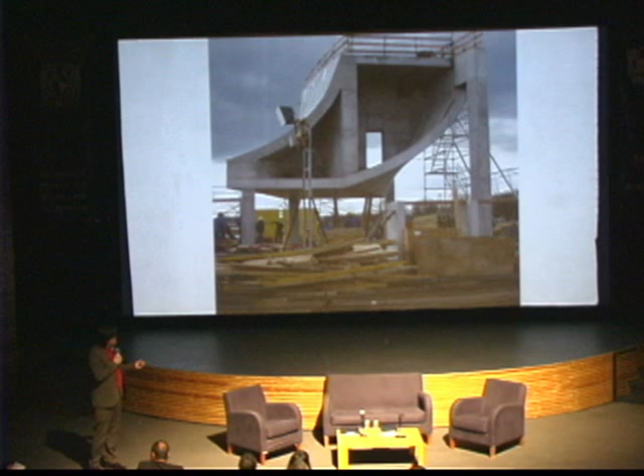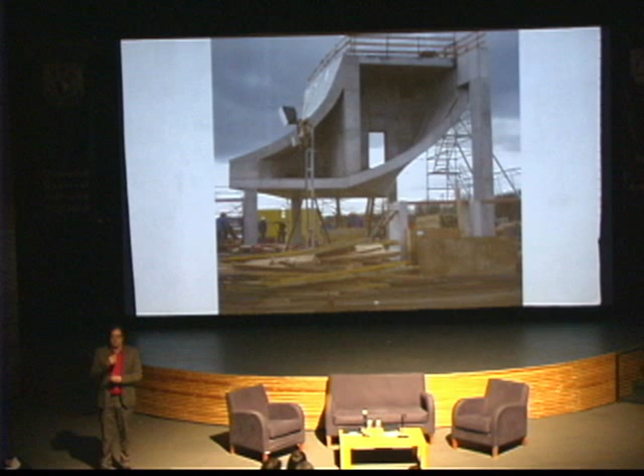On site, we work with large mock-ups. It's the same as a model, but then in one-to-one scale. The reason why we do that is because we can then test if the contractor understands what we mean with a nice and flat surface. And if we can approve that by signing it off, during the construction period we can always refer back to our mock-ups. We do that also for the facades.

Sometimes it goes wrong, so you see a part of the team desperately thinking about how to solve it. And then we go back to our drawing boards and sketches and continue working.

Sometimes this is an engineer. The engineer does not believe our vision on structure. We, however, are very enthusiastic and motivated to explain him why we think it is possible.

And I think when I go through the projects, you understand why we have to be super positive. So I think one of the challenges is, as an architect, to never get depressed and to always be super positive. That's really an advice I would like to give you. Because in the end, everybody you will meet who's working on your project, trying to build it, will tell you that it's not possible, or that it's too expensive, that it's not within the planning budget, and everything else they can mention, because these are different values, different parameters.

For us as architects, we value money different than quality. And quality has a different value, and I think it's a language that we know, and that we always have to explain to clients and other advisors. So we are traveling a lot, and we want to organize knowledge. I think knowledge is something that can really help us convince clients to believe in what we are doing.

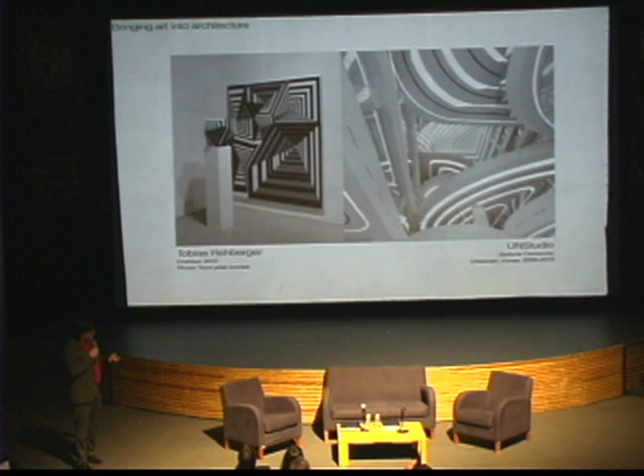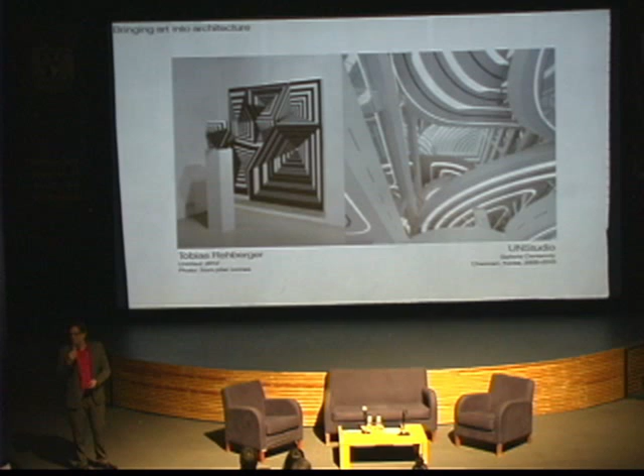If you want to have people moving up in a retail building, because square meter prices are more expensive on the ground floor than one level higher - the higher you get into the building, the lower the square meter price is. But as an architect, if you can bring people higher into the building, the value of the building increases. Every developer likes that, but look at this - this isn't a great image to present something like that. Without a story about economics, no developer would step into it.

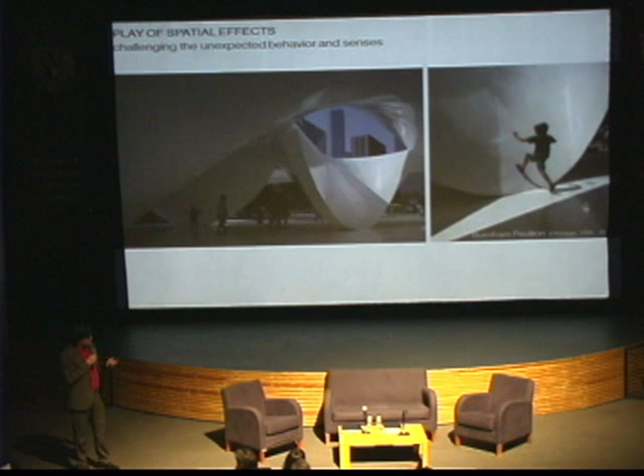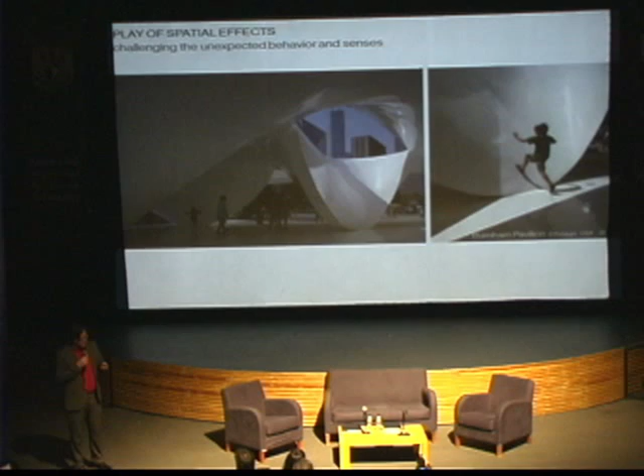The same with pavilions, playing fields. Not only the pavilions themselves, but also the way you could test and experiment with pavilions is great. You could really look at seamless materials, look at how it could become a playing scape, but also how you could frame pieces of a city.

I think there's a lot happening at the moment in computer developments, software developments. One of the things we think is fantastic is that you can have new CFD analysis for calculating wind patterns. For this project, we said we are calculating with CFD analysis if you can get the wind to 20 meters height.

You have to imagine the project is close to Shanghai. Shanghai is super polluted - this is Hangzhou, where people from Shanghai normally have their holiday home. In this area, if we can get the wind to 20 meters, we can get a small draft, and because of the draft, we can cool down the lower level, the first 1.5 to 2 meters. We calculated with engineers that it would cool down around 8 to 10 degrees, just from the wind you already have.

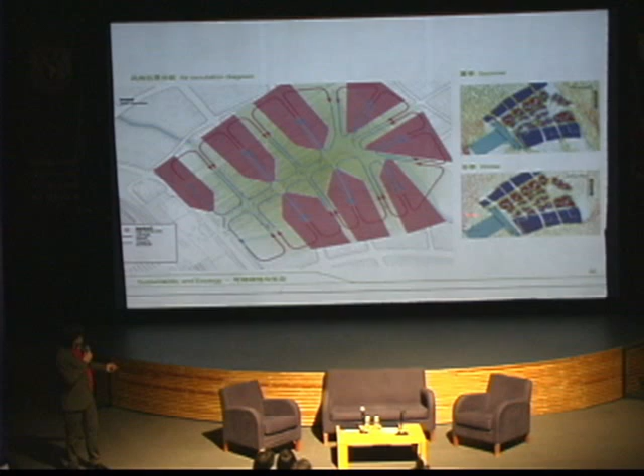The only thing you have to do is make a canyon of 1.5 kilometers and around 400 meters wide. But to do that, you need to densify the program on the sites. So as a master plan and project, we think it's crucial - if you want to make cities healthier and lively, you have to look at these kinds of solutions, different from the standard urban grids. Using the wind, you can do this in a lot of ways.

I think these are ways of designing sustainably, but in an innovative way, and we think there's a lot of potential. The last few days I was here in Mexico, I'd say we have quite some wind, so it would be good to use that in projects. It would be nice to see how to cool down a city - the advantage of Mexico is that the city is very big and doesn't have a lot of super high rises, which means you could actually use that.

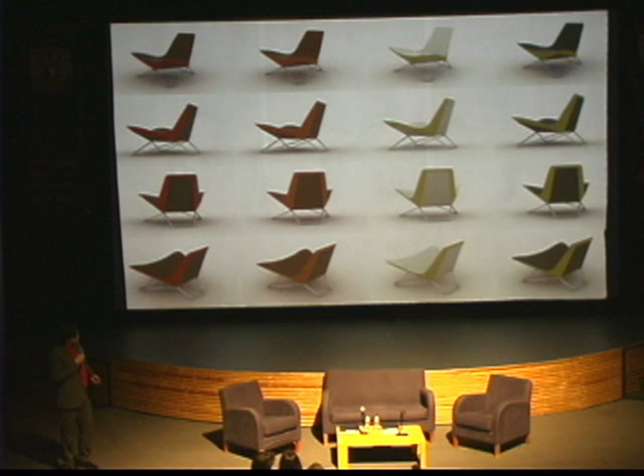Start on a small scale, furniture. I think in furniture it's much easier to use color. So if we design furniture, this was presented last year in Milan and this year too, we can easily use color—nobody actually challenges it.

If we use it in a building, it's immediately a problem. We talked for a year with the urban planners about the outside facade. We could not use color there.

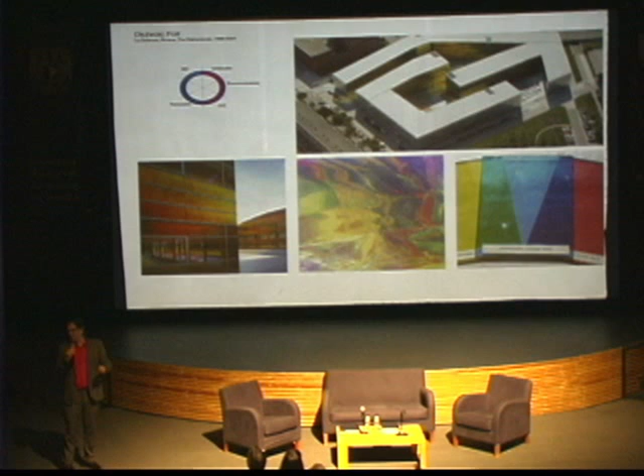But imagine on the inside we use a color that actually changes when the sun changes its direction. So when it's blue, for instance, you know it's lunchtime. When it's red, you know you can go home.

And the same as with artists—there are a lot of artists who work similarly to the way we are looking at our work.

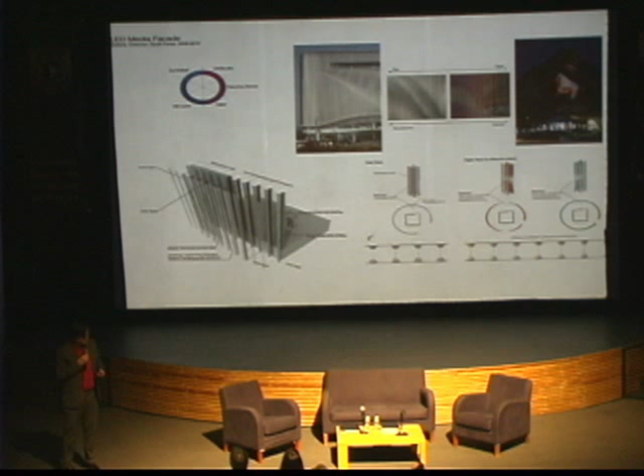Technically, the LED was not invented only to produce light, it's also meant to communicate, is our belief. So designing facades where LED lights can play a role without becoming too commercial is quite nice.

So this is the largest LED facade in the world at the moment, in Korea. You literally can project images on the facade. We made high resolution in one corner and then it slows down to low resolution.

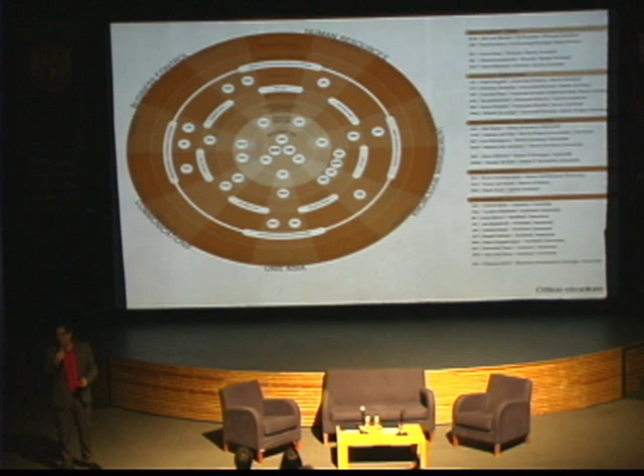Office organization, we have to organize an office always hierarchically, but we also know the importance of the staff itself, the founders of the office. It's great actually to work with Ben, because he really is motivating everybody to get out of yourself what you can get out of yourself, but also from the clients and the other people in the network. We have a team of directors and partners, and we want to be close to clients.

That's why on our business cards we keep on mentioning that we are architects, because I think that's the key thing why we were studying architecture, not to become a partner or a manager or a director, but to become an architect. That also counts for our associate team. With this team, we are actually traveling the world to meet our clients and make sure that we can deliver the products that we would like to deliver. We have our social events, because I think a good office should also organize good parties.

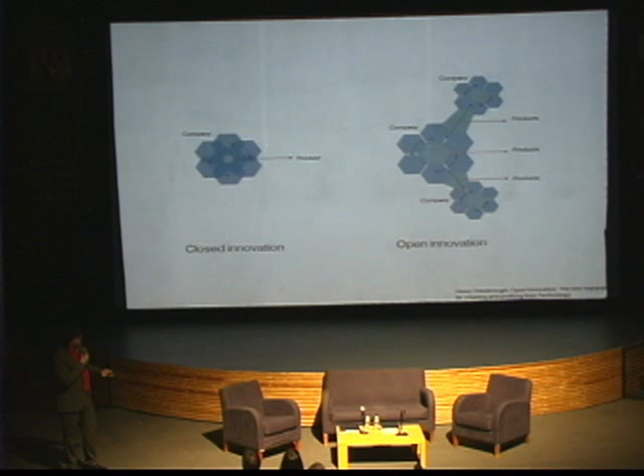What is most important is we should not keep all the information within our office, but we should really communicate, work together, and spread the knowledge that we have, because you immediately can see that there's enormous potential in sharing knowledge and asking for help or asking questions. If you don't do that, you for sure know that you won't get the answer. A lot of advisors are very open to share knowledge and to work with knowledge. At the moment, with all the information that's on the internet, it's easy to let other people and other architects or friends help out if you are dealing with a problem. Even if a client keeps on telling you, well, it's confidential, you should not talk to somebody else about it because you are exclusively working for me, actually, that's bullshit.

So, going back to Le Corbusier, I think Le Corbusier is great and fantastic, and he really changed time. But I think there's one thing, a most important discussion within the modernistic world, and that is about color. What he literally says is, take out everything. The discussion is about what is more important, color or a line. He says the line is more important than the color, because the color distracts from the line.

If you take that literally all the time, you would actually get quite a boring world, we would argue. So it's okay to do it now and then and to really make brilliant pieces of architecture, but not every building that's built is a brilliant piece of architecture.

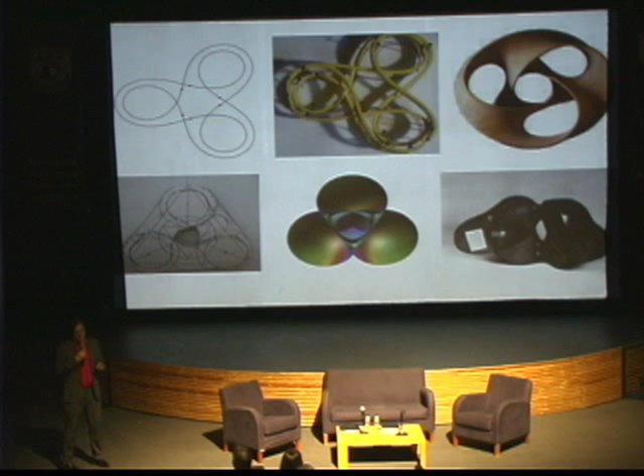Why the line is continuous is because the racing tracks of Mercedes are continuous. They put a car on the track and they have to drive 1 million kilometers in a certain amount of time to test the engines. So that concept is quite interesting. They use the Nürburgring for that. But inside a building, for cars, it's also nice if you would move around like a car, that you would feel that you are the car almost.

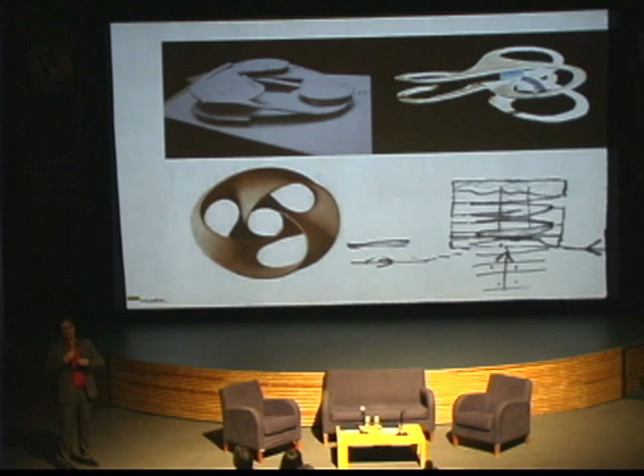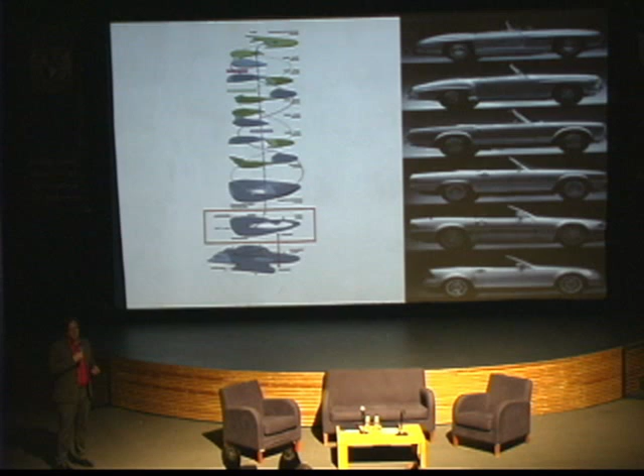Next to that, logistically, it's important to understand that most of the people that go to a museum only go there for an hour or two hours. Only when you are going there with your family and you make a day trip out of it, do you stay there all day. So what we said is you have one route which is actually the existing collection, and then another route which is just the temporary exhibitions, with shortcuts between the different exhibition floors.

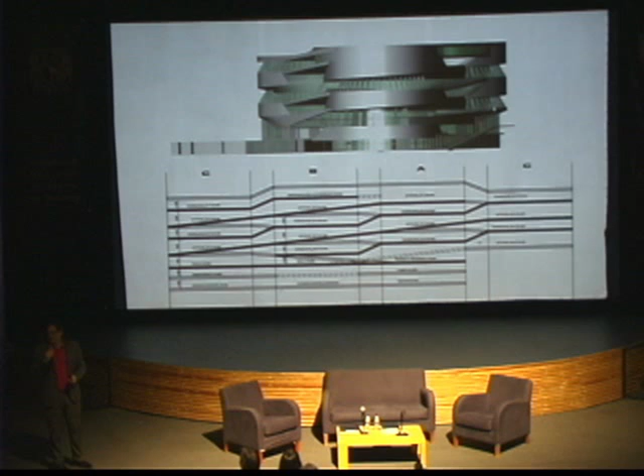We use the principle of MoMA and Centre Pompidou to create our logistics system, which is actually, if you would make a section, looks like this. And I think you immediately would agree with me that if you have to make sections of a building, and they would look like this, it's very difficult to explain to a contractor, which is also a problem, and that's why we started to build up our models geometrically, just to make sure that we could explain to the contractors in 3D how our buildings are working.

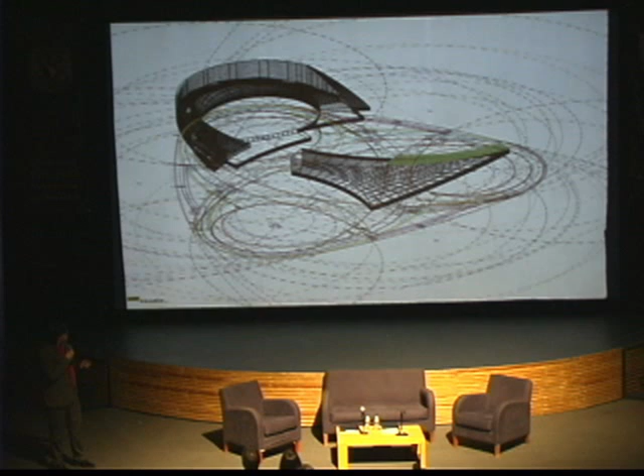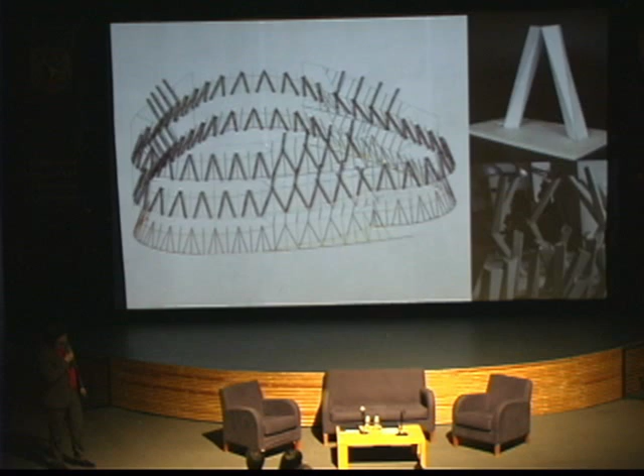However, not every contractor understands this language, so I think there's still a large development that needs to take place to be able to work three-dimensionally, because the design tools are there, we can design with it, but the construction sites are not ready for it yet. So you still build large models, which is fine because they're great to work with. This model is scale 1:43, the same scale as the small Mercedes cars you've seen earlier, so you can literally put the small cars in the model and see how it works and how they drive.

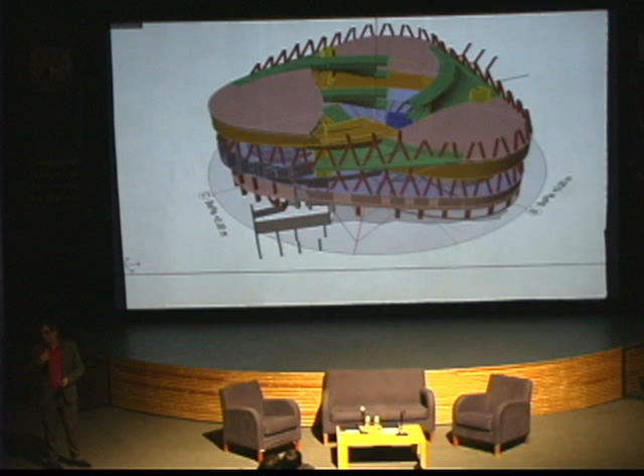Of course, 3D modeling and BIM modeling is key to communicate, but we constantly had 2 people working on the construction site and on communication to make sure mistakes could be corrected. Yes, we had to make technical drawings, but we also know that if we went 1 meter lower, the drawing would already be different.

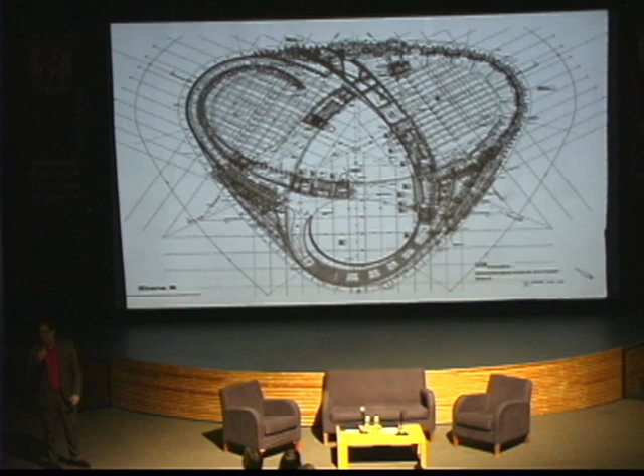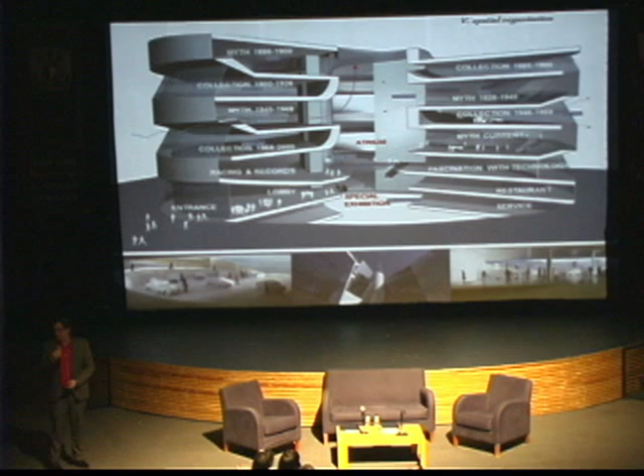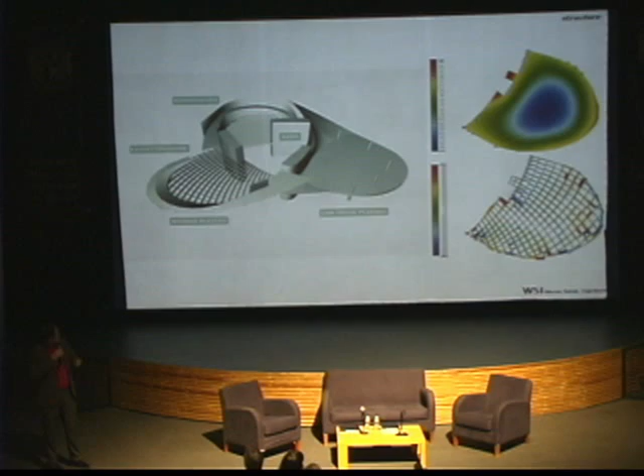That's also related to our structural system, which more or less runs like this. But we wanted free span, no columns, to give the cars the space they need. With the engineers, we looked at the structural systems and how that could actually work. I think for a building like this, the software you have at engineering offices is great for generating these types of buildings. We constantly kept adjusting the building with new information, which generated quite some speed.

Construction site, 24 hours a day, full-time people in shifts, 8 hours on, 8 hours off. That was necessary to meet the deadlines. So you can imagine that's quite an interesting pressure to work with. I think there too, communication is key, because everybody who wakes up in the morning and wants to go to work would like to do so with a smile. If you're frustrated for 2 years, it doesn't work. So you have to find a way to make it fun to run a construction yard like this. That's what we tried, and of course also cherish the moments when a piece comes out right, when you're actually happy with the result.

Facades. Here you see the large atrium where you enter, and the elevators that bring you up to the higher levels. We were able to design the elevators ourselves. When you entered, this was the space you were entering, and there's just one horse standing there, which represents this 1 PK.

And then you go down, and this is the point where this tornado came out of, where a jet engine was literally put in. And you walk down through the building.

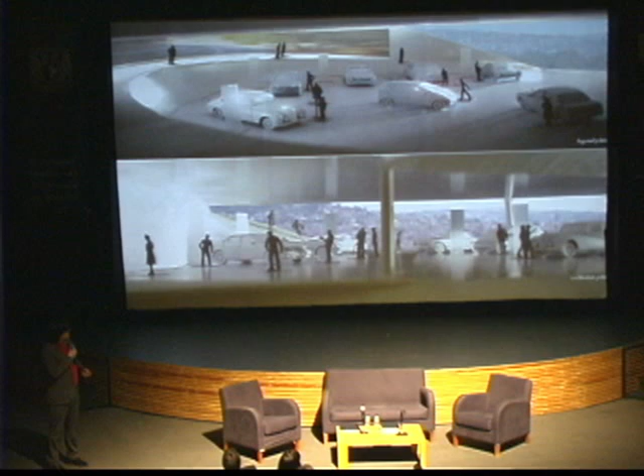So designing the interior, like the exterior, they literally were able to put the cars on the wall. It's great to see a row of cars, and they made sound next to it so that when a car was in the spotlight, you'd actually hear its sound too, because every engine had its own sound. You know it when you're listening to Formula One.

So for us, designing is a kind of process we go through, the same as with traveling. You all know that if you go to an airport, it looks like this. So the question is, what's the best way to organize an airport? This is actually what we would like, if you're flying, just a bit more comfort.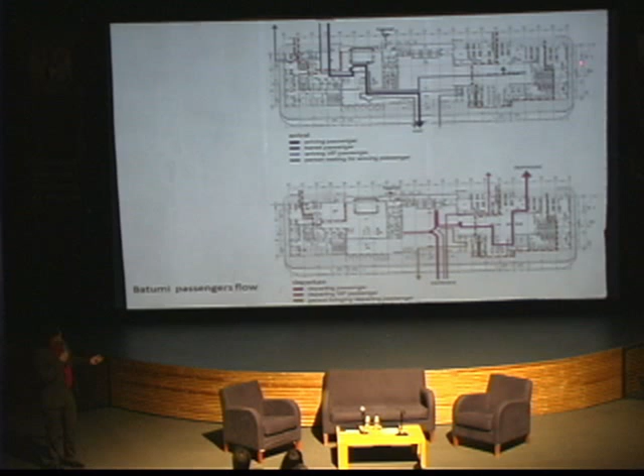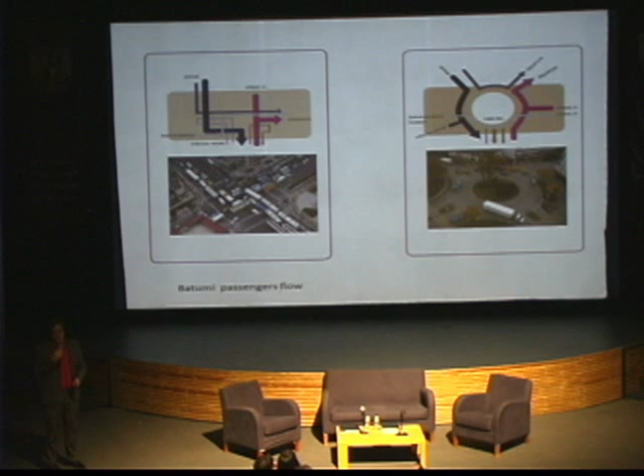This is how a plan of an airport looks like if you analyze the logistic flows, and this is what you get, because the luggage and security is more important than the people. So we proposed an airport like this, where people would actually have a much easier flow through the airport. We had quite some discussions with security and luggage handling people, because they needed an extra scanner, but in the end we convinced them this would really be the right solution, that if you're standing in front of the building you can literally see the planes. It's a small airport, so why make it too complicated?

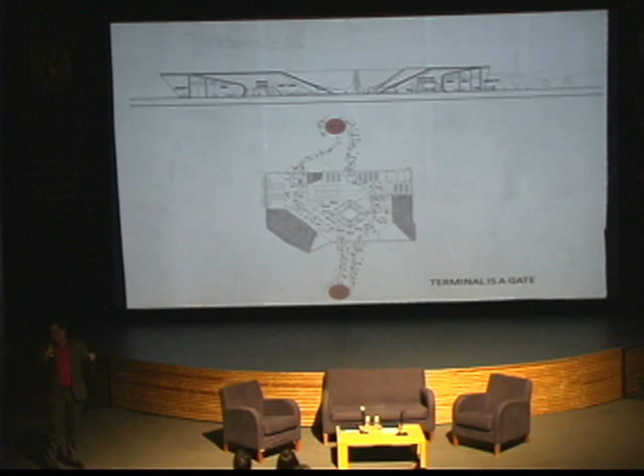And we could design the air traffic control tower, which is also quite a nice tower to work on, because on one hand it's super complicated, and on the other hand, it's the place where safety is being organized on a very high level.

Pavilions. But imagine what happens at night with a pavilion if you start to use light. People were married here. People made appointments there with Facebook, social media. It became a destination. Even if it's very small, it still became a destination.

Or this, one of my favorites. It's built before the Second World War in the Netherlands to protect the Netherlands from attacks. I mean, you have to understand, we as the Netherlands have been conquered by the Spanish, by the French, by the Germans. So most of the time we were either at peace or we were conquered.

This is a Dutch army, so you also understand why we were conquered all the time. And what we did was we were flooding our own country. So Holland is for 1/3 under sea level. So by opening the dikes, you were flooding your country again. The only thing we did not—

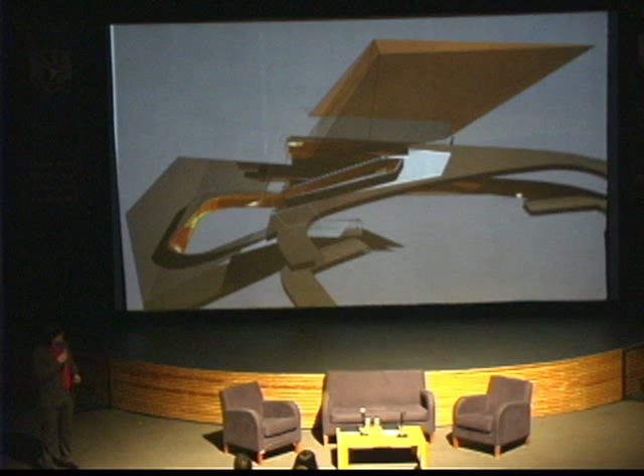So this theater has a huge skylight, and the way the staircases go down is actually followed by color. You can program it in the computer and then look at how it works in reality. The interesting thing is the color changes again—it goes from pink to purple to almost orange.

So the way it's used is also sometimes theatrical. So why not make a foyer where the foyer is also the meeting point, like the theater itself? In most of the smaller cities, this theater has a public function—people from the neighborhood go to the theater also to see the play, but also to be seen. So it's also a way of connecting communities.

But you have to look at the sizes. I think this is a village of about 60,000 people. So with 60,000 people, you can have one or two theaters.

New computer technology to develop sound, to design with sound, literally by changing the facets and fractions of this auditorium. And if I'm on the stage of this theater, I can talk without a microphone, and every seat can understand me. That's what we could do with the acoustics in this room.

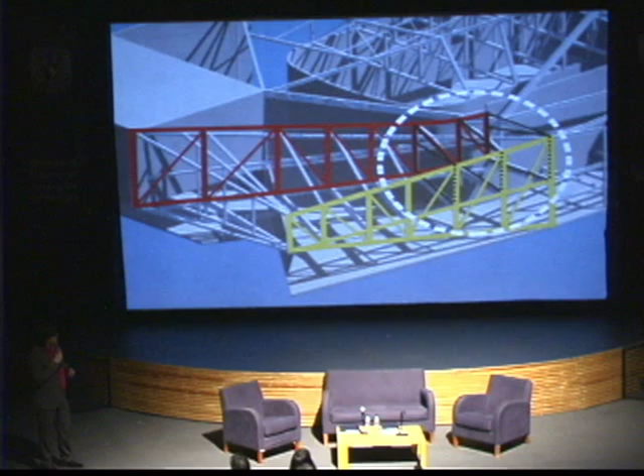And that's 750 chairs, engineered with important vibrations in mind. These pieces of rubber are between every piece of steel, and this is for the main auditorium. What you normally have with a car—we had to put these elements underneath it so that we could reduce vibration. It's also something you know from earthquake areas.

So we made it orange to make it also a bit lively in the city. Together with the urban planner and the mayor, they were all really pushing us to make something with a bit of color, because the city was very colorless—gray, brown.

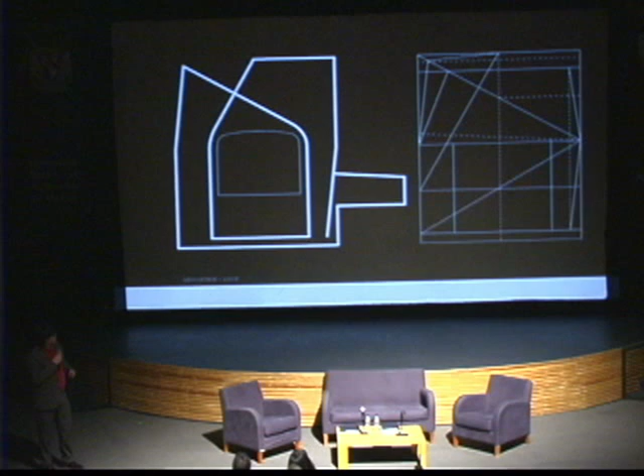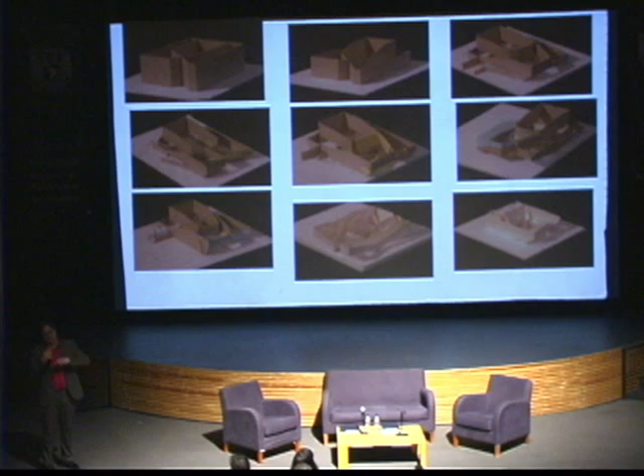To design these kinds of details, we put everything also in 3D to make sure we could organize it. So organizing the theater as an architect is also about looking at geometries and how structure works. These are just structural models to see how we could design different beams. We were just sitting for a few afternoons with the design team, from trainee to director, making these kinds of models to figure out how it worked.

All the measurements need to be repeated—details, 3D details. So we use Rhino for this. It's a very cheap software package that can also be downloaded for free, and I think Rhino is a package that every student of architecture should use.

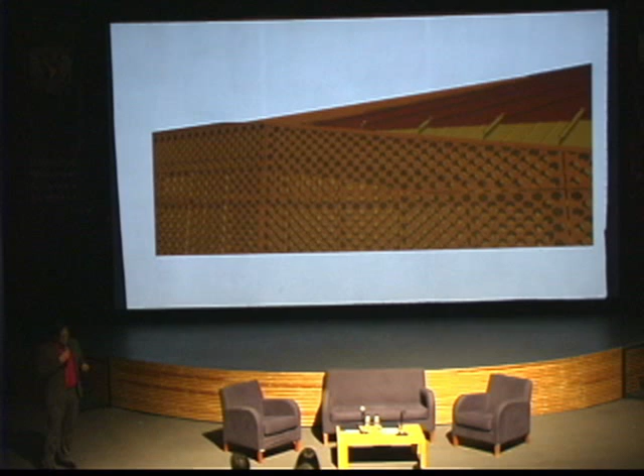It's like playing a game. If you know how Rhino works, you go to the next level. And if you know how the next level works, you go to the advanced level.

All the smoke exhausts are behind the screens of the facade of the theater.

In Holland we love skies. We have groups of painters that use light because of the sky, like Rembrandt and Van Gogh. We have painters that are only designing skies, what we call the School of The Hague, a very famous school only collecting and painting clouds because of the light. And that's because we are in the Rhine Delta, very low. The clouds are also very low, so the light reflects into the clouds and into the sea and back, so you get a very interesting contrast to work with.

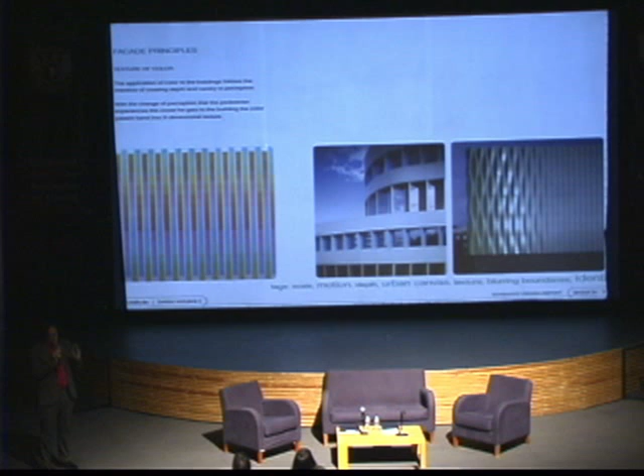Using the clouds as a concept, or using light as a concept, or even makeup, or Japanese mangas as color concepts, is something we are looking at in our office to see how we could actually plan and design with color, or Riley, an artist. This is a building in Stuttgart, where we use this color also to play with how the buildings works, or a laboratory building, just opening up in key corners.

Inside, bright orange, it's great to be there. And there are only 8 to 10 students and scientists working on one floor in these laboratories. This is the Stuttgart Virtual Engineering Center, and especially the way how the color changes through the day is fantastic to see.

And inside we played a bit more subtle with the colors in the staircases. So you see the yellow here, the orange there. But I think we would like to use it a bit more, but our German client was also afraid of that. They were afraid that it would distract too much.

But also highways, you know, why not use sound screens on highways and give it a nice color? Or small tunnels, or all these things you have next to highways. By giving it a color, this is flyovers, you could actually make it more lively. And it's also recognized because this highway, everybody who lives in the area of that small city, they know about it, but they also know that if they're driving there, that they are almost at home and so they don't miss their exit. Because in the car when you're driving, a lot goes automatically, so you're not always paying attention because you're still thinking about your work, about what you have to do.

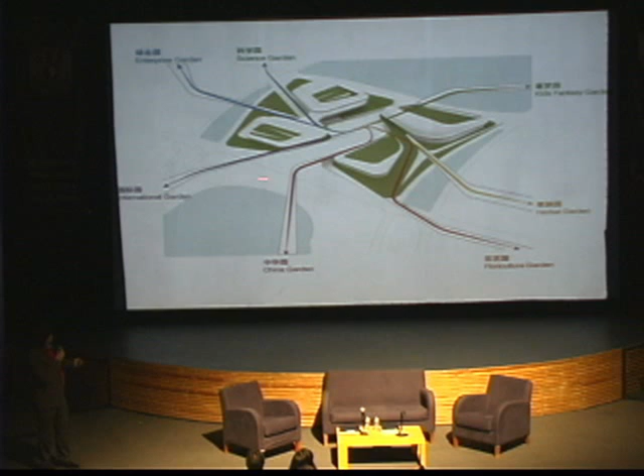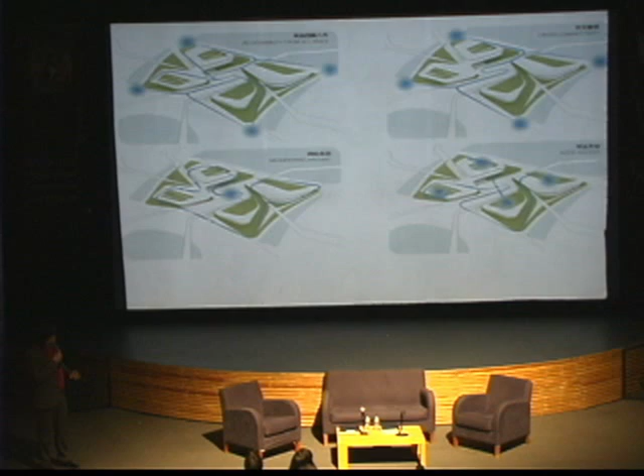And it goes into different ribbons, and all the ribbons have a color and go to different gardens. Our concept is a bit based on how we would like to walk around the building, and that is also the shape of the Chinese rose. You can go in different ways, and we used also the different colors for the ribbons in the facade.

And I think that if you see this, knowing that it needs to be finished the 25th of April, get a bit worried.

But what about cities in Asia? Large cities like this, a lot of concrete, they all look the same. So how can you identify something? And you also know it from Hong Kong and other cities. So we think that there's quite some opportunity still to test and experiment on an urban level, also with color.

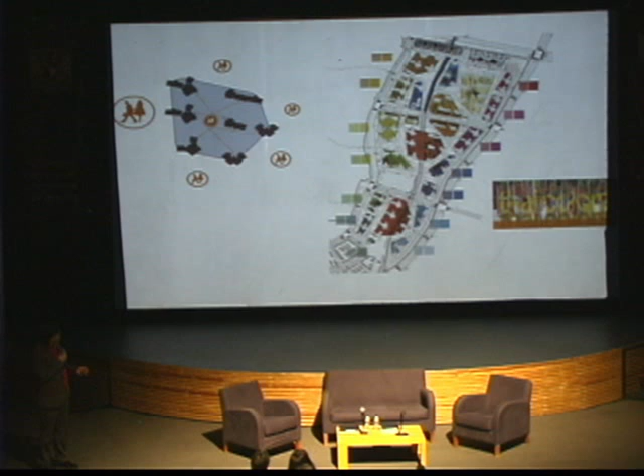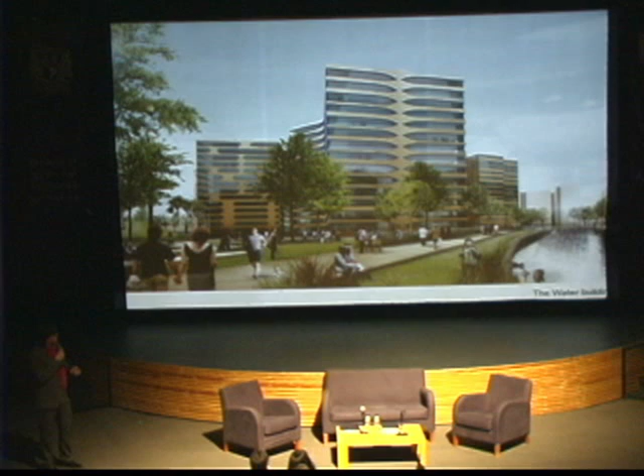So we try to work with clients also on these color concepts now to see how we could bring in more color to use it as destinations or places to come to, so that you can find your way actually back. It doesn't work actually always, and most of the colors the clients think are too bright, they don't want to use it, while it's not really bright, but still they are afraid of using the colors, which is, I think, a pity.

So the next project, also in Korea, we are working on is also trying to convince the client to use more color. And this is in the city of Daegu, and the advantage of Daegu is that it's a city where fashion is key, so it's really a fashion city, and they also have urban planning regulations, and in the urban planning regulations, color is a key element. So they actually tell for certain areas that you need to study how color is being implemented.

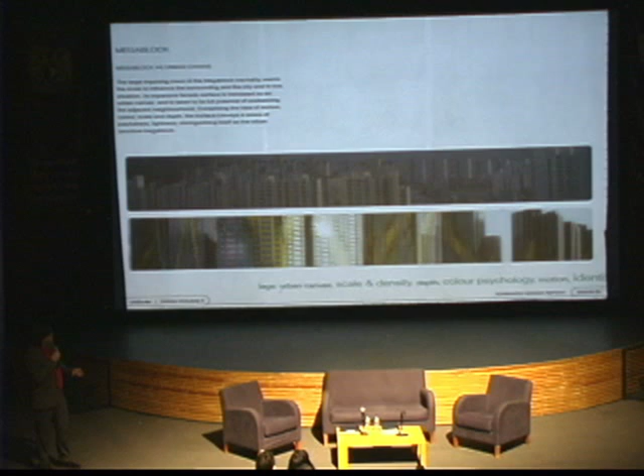So we were quite fascinated by that and started to look at the Bojagi, which is more traditional, and or pointillist paintings of Dutch artists, and how we could actually use that to brighten up the buildings. So then you get to the next level of Rhino, which is Grasshopper.

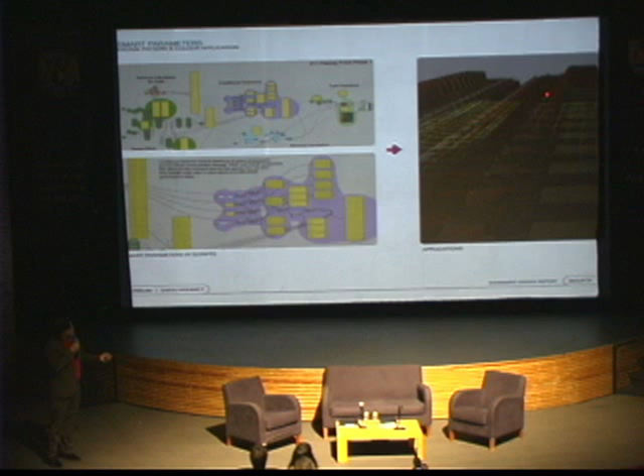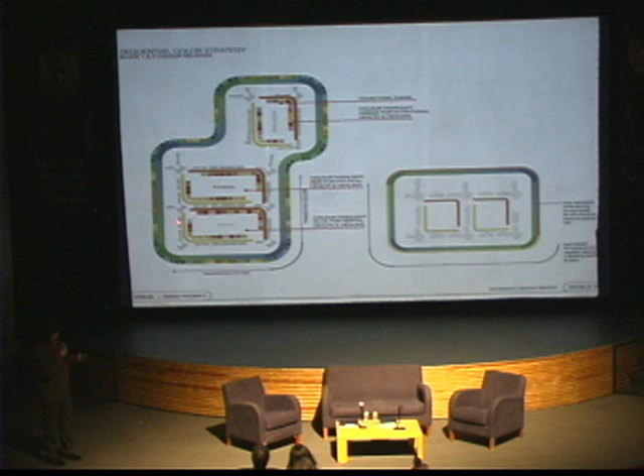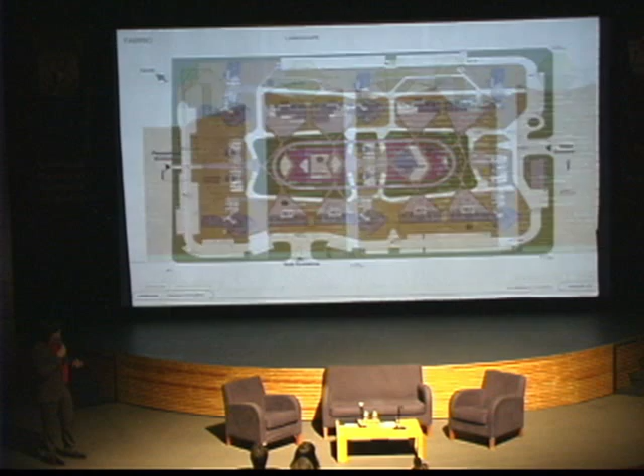In Grasshopper, you are able to connect parameters to every piece of element you're designing in Rhino, and because of that you can start programming it literally. So with all the colors you could plan and use, you could start making more orange pieces, or yellow pieces that's warmer, and green and darker pieces. Here you see what happens if you start to program the facades of the building - it actually generates the colors. Of course, it needs to be integrated with the full planting schemes.

Moving into commercial advertising, this is what you normally have in most cities, and we think it's better or nicer when you don't have all the advertisement, but that you have more one identity inside one building. So for this building, we were asked to look at the facade and to design it.

This is quite a bad concrete building, I would say. We really collected discs and hung them all around the facade to reduce the advertisement, and then there's one piece where you could actually show the main advertisements of the building. During the night it looks like this - literally there's an LED facade behind it, and you could light up the entire facade.

I think this became one of the coolest buildings in Korea, and it's in Gangnam. So a lot of young people went there. Because the young people went there, the parents went there, and they earned back these investments in half a year, our client said - so quite valuable actually if you would compete with other competitors.

So we actually see our ceilings as catwalks, because that's what you see - the floors you almost don't see when people are walking on it, so to orientate yourself it's better to use the ceilings. The same with this project in Wuhan, where we also tested how we could work with light, glass, and materials.

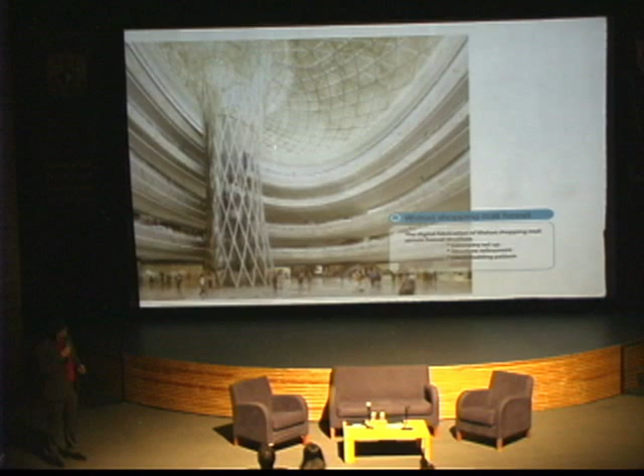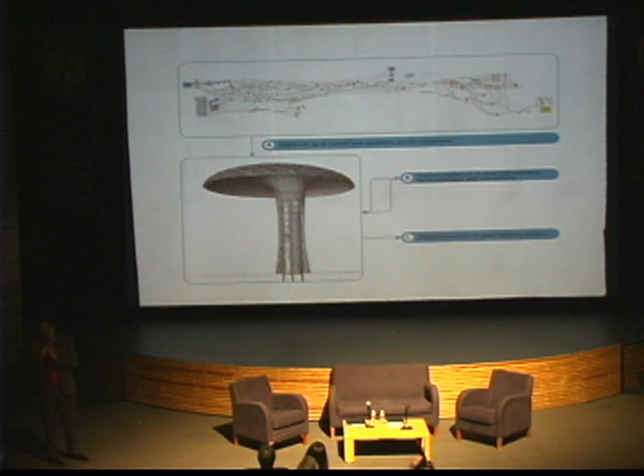That's actually then you get to the last level after Grasshopper, so Kangaroo. You start to really script down exactly the patterns of how the patterns can be used, how the cutting pieces can be used, and that's all transformed to Excel. The lists from Excel go to the manufacturers, the manufacturers mark the pieces, and on site you have to put the pieces back together, which is normally the biggest problem to do.

But if you're doing that, you are able to design great atriums that are also spectacular when you're underneath it. That's exactly the effect you would like to create with an atrium, because we think that if you have this after-image, and if you can create the right stage - the same as with theater - you can create the right emotion, and people will come back to it. I think you also know that this emotion is important in a city and in a city fabric.

So that's what I would like to share with you. First of all, in our opinion, it's about the people and the techniques and the way how you collaborate. And second of all, it's also to try to experiment and try to challenge everybody to make the world a better place. Thank you.